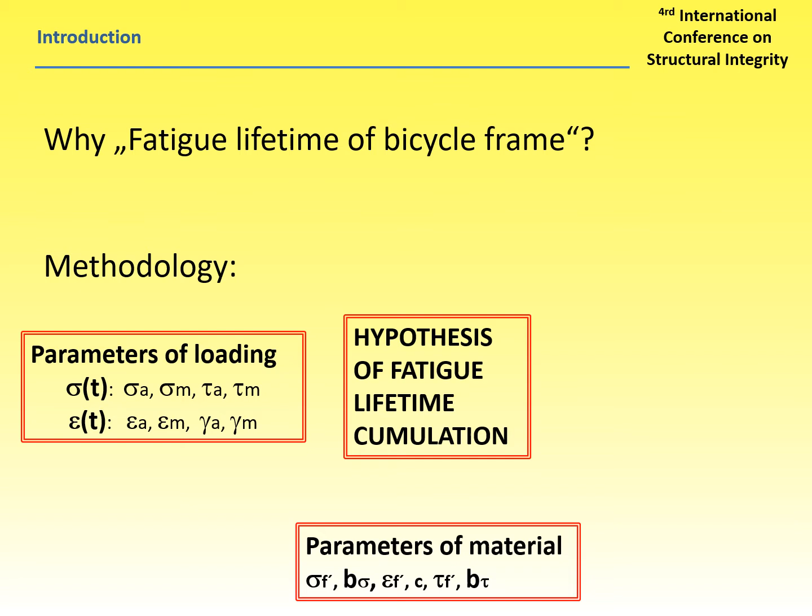A bicycle does not seem to be an important structure, but the safety of the rider must be guaranteed. Fatigue lifetime assessment will be based on the safe life approach. At the beginning, we have some loading parameters and material properties, and by using a fatigue accumulation hypothesis, we get a probability distribution of failure.

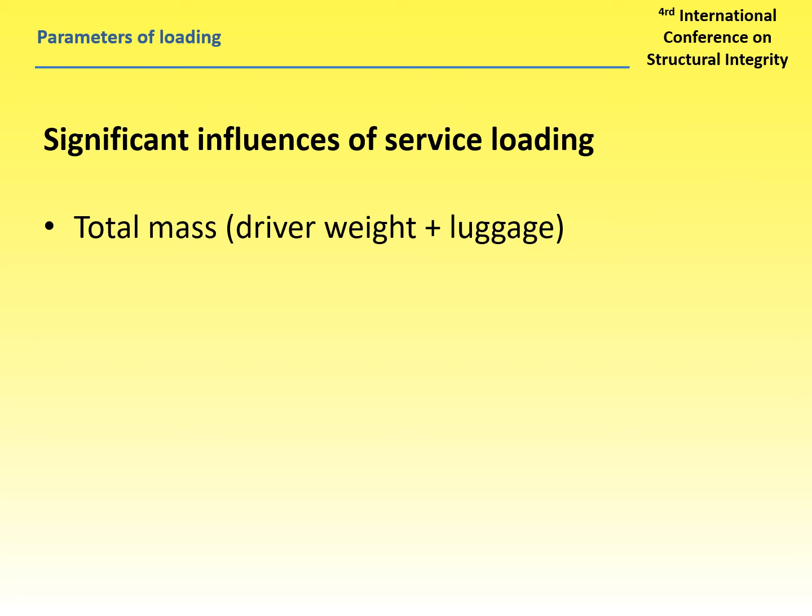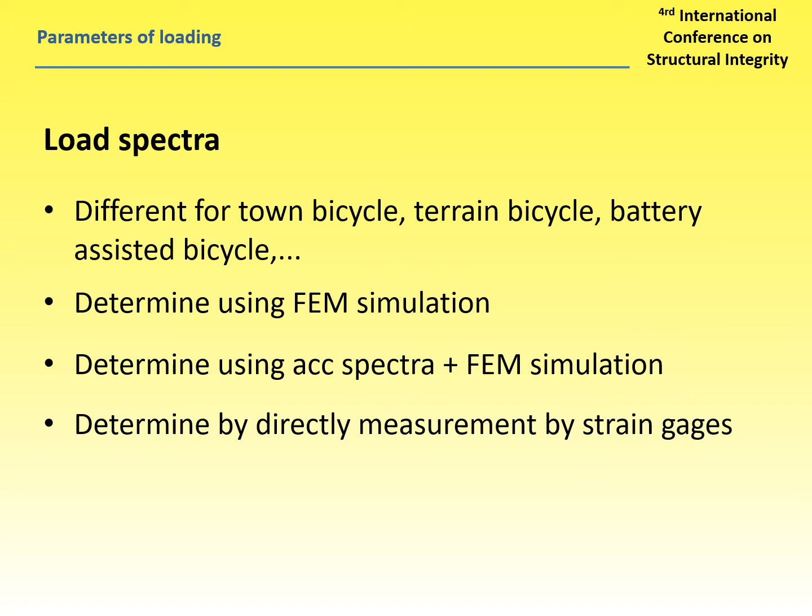The parameters that influence the loading are total mass, driving style, road surface, structural design, and last but not least, tire pressure. By taking these parameters into account, we can build a spectrum for a specific type of bicycle in three ways. First is by using a simulation. Second is by using a combination of acceleration spectra and the simulation. And the third is a direct measurement by strain gauges. In this work, we chose the second method.

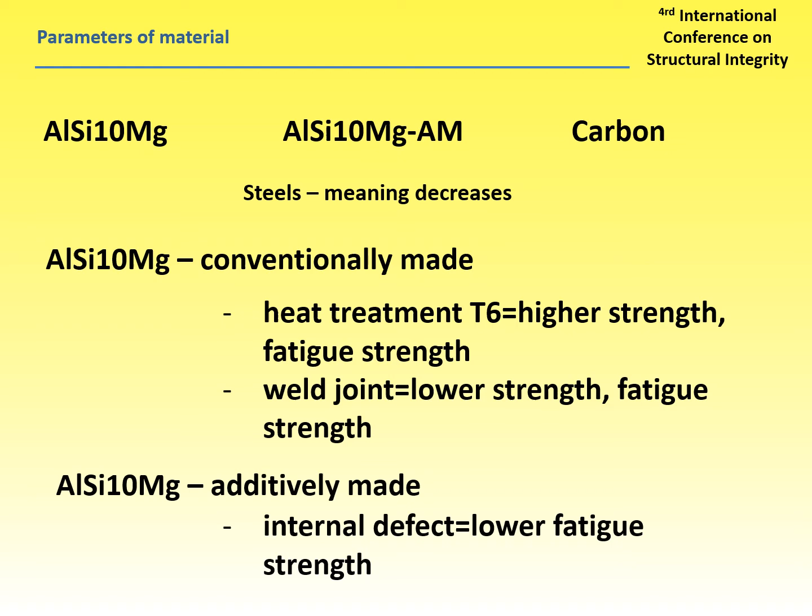The most common materials in bicycle frames are aluminum alloys and carbon composites. Aluminum alloys could be made conventionally or additively. Conventionally made materials have very good fatigue properties, but the fatigue properties decrease in welded joints. On the other side, additively made materials have no welded joints, but the internal defects lower the fatigue strength.

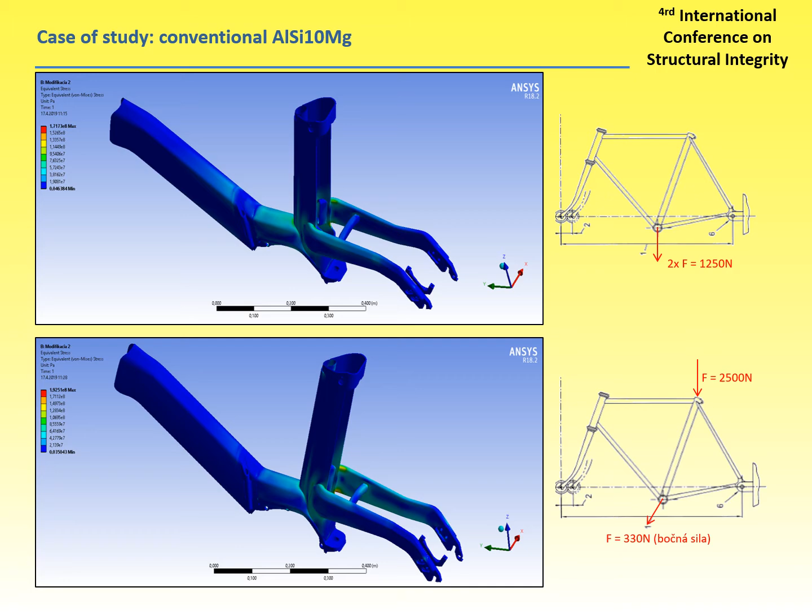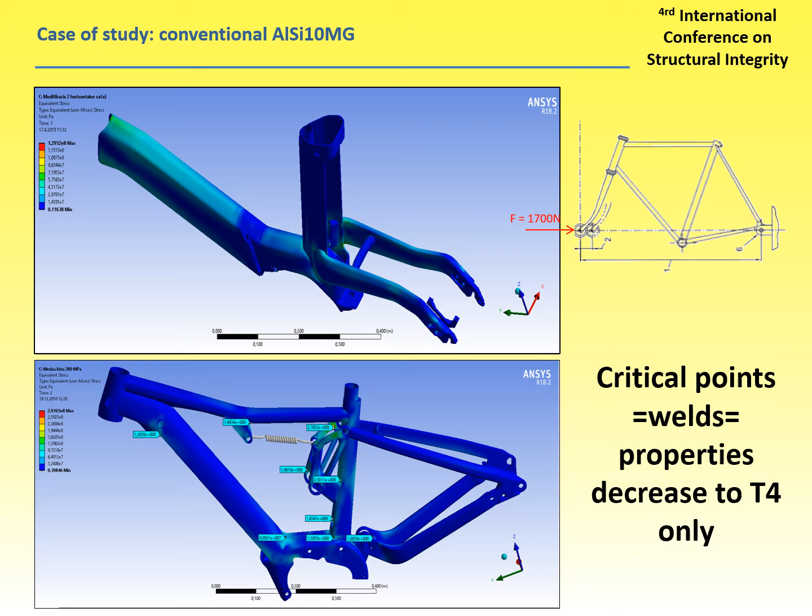Here are presented simulations of bicycle frames in 4 loading modes defined in the Zedler test. The critical points are in welds, where the fatigue properties decrease. The question is whether an additively manufactured material could overcome the low weld properties.

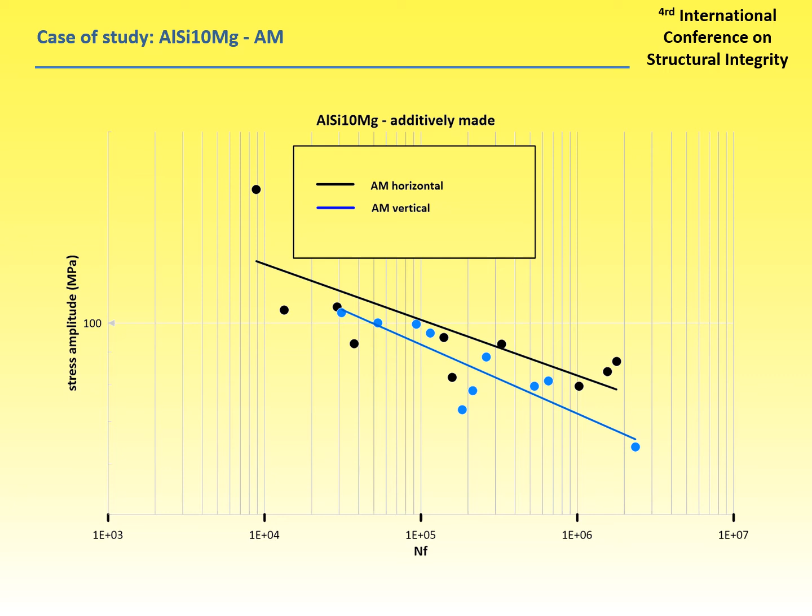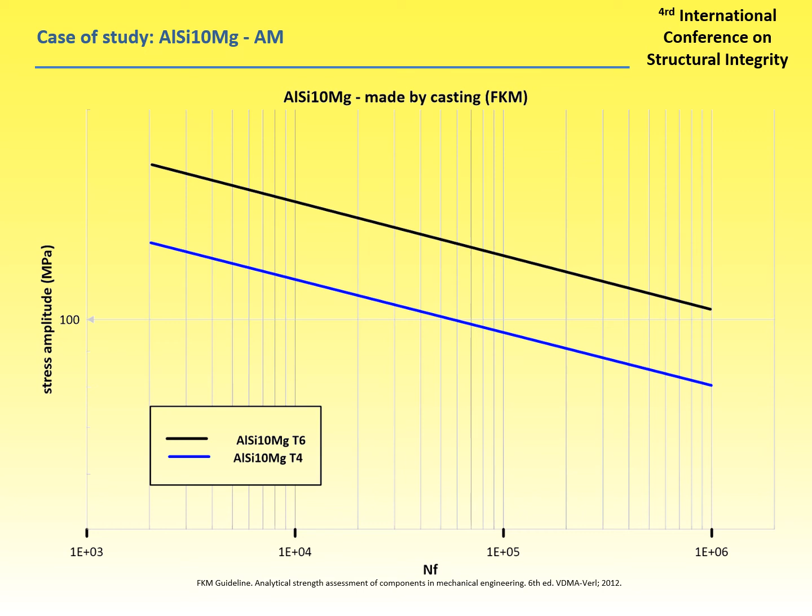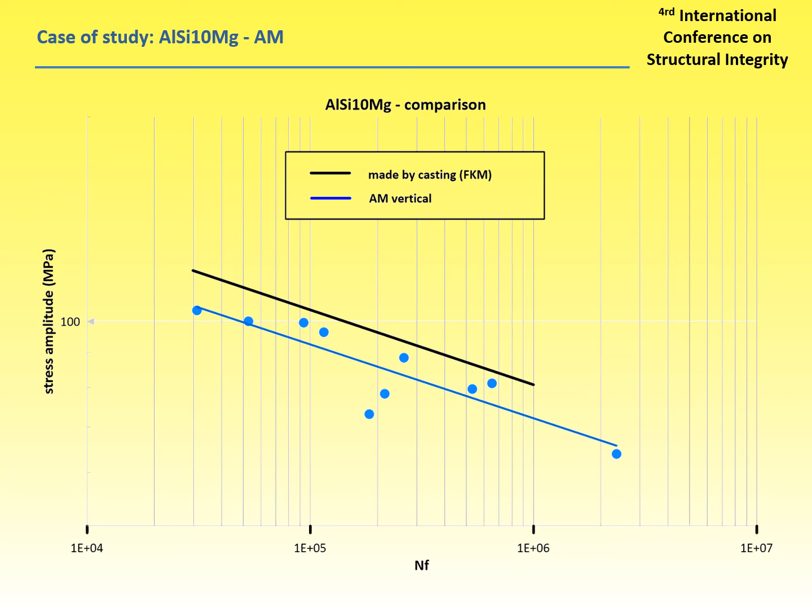On this slide, you can see the comparison of two heat treatments of a conventionally cast alloy. As I mentioned before, the critical points are in welds, and these have the properties of T4. Therefore, we will further consider only T4 properties for a conventionally cast alloy. Here I would like to present a comparison between fatigue properties of vertically printed specimens and the conventionally cast materials from FKM standards.

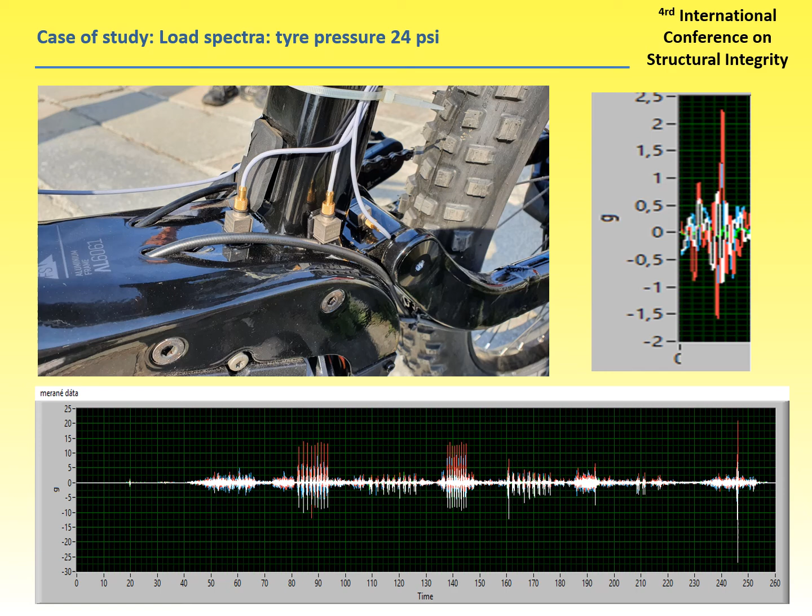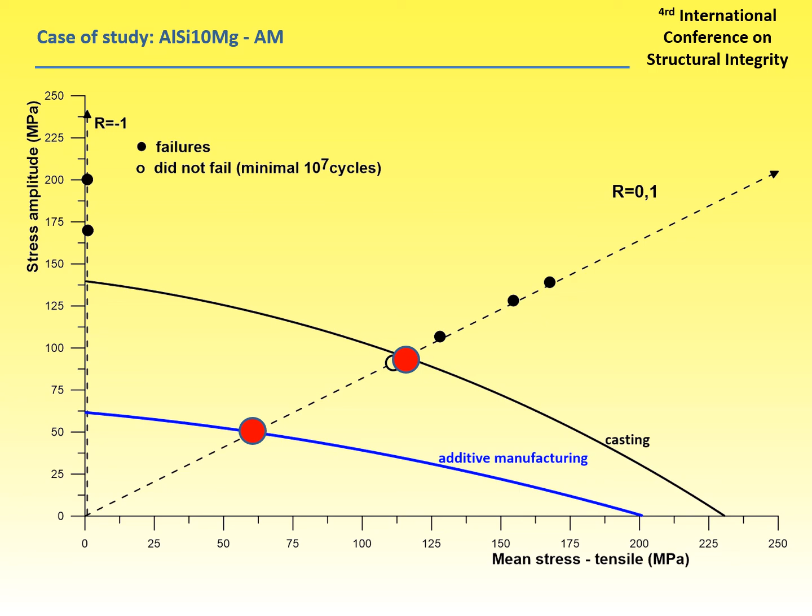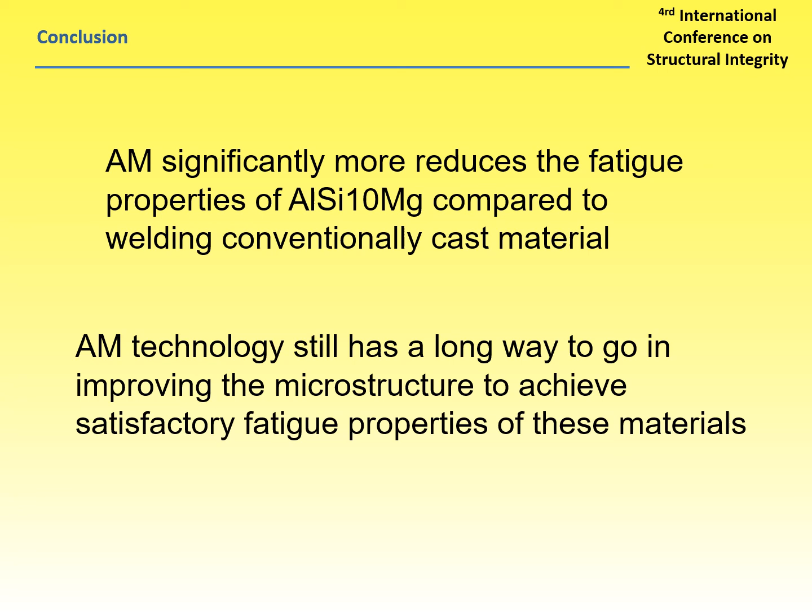For a final comparison, the Haigh diagram was chosen, which relates cyclic amplitude to mean value. The graph shows a significant difference in cyclic properties. The marked points show the maximum allowable combinations of principal loading. The conclusion is that additive manufacturing reduces the fatigue properties of the particular alloy significantly more compared to welding conventionally cast material.